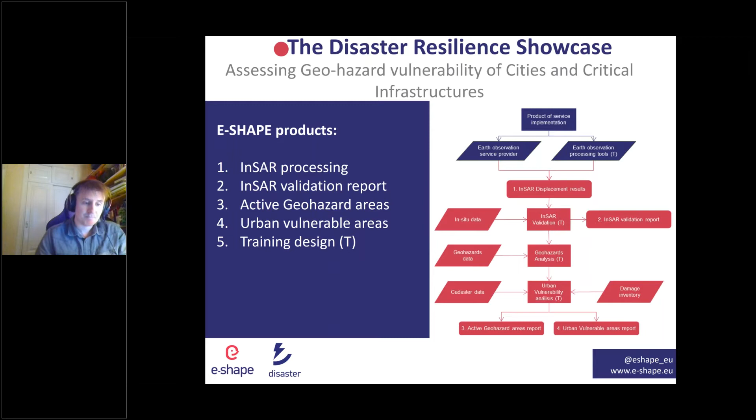The last main product is the Vulnerable Areas report, and this product is supported by cadastral and damage information that allows us to identify the vulnerability of the buildings based on the InSAR displacements. In order to show better the possibilities of this methodology, we have applied it to the Murcia City and Alto Guadalentín aquifer systems, an area affected by land subsidence due to groundwater extraction.

This example has been used to co-design the methodology between the Spanish Geological Survey, responsible for the proposed products, and the Groundwater Authority of Segura Basin, receiver of them and responsible for the monitoring and exploitation of the basin water resources. Our stakeholder proposed us to develop a product that helped them to improve the management of the aquifer system.

For us, the challenge was to provide them the specific information that they required to monitor the Segura Basin during the pumping periods, correlate the detected surface displacements with the groundwater changes, identify the influence area of the pumpings, and determine the accumulated displacement and their impact on the buildings. And make that, this is an important point, make that information useful for the exploitation strategy. In order to do so, we designed the previously presented products that I'm going to explain better with the outputs that we have obtained.

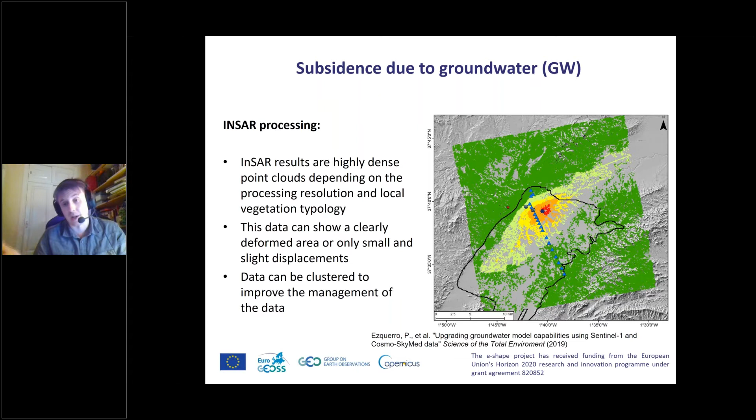In this data also can be clustered to improve their management, and this is one of our first products. Also, it's important to deploy an additional monitoring system to validate the products. This kind of validation needs a contemporary and continuous dataset of GNSS permanent stations, but also can be performed using leveling data or other kind of, let's say, campaign measurements based on GNSS data.

These validation products will provide the root mean square error and the relative error of displacement velocities and time series. If the GNSS or leveling data are not continuous or not contemporary to the InSAR, the validation is only partial, but it's still important, especially for the interpretation of the results.

The active subsidence report is composed of two different steps that define the area of influence of the extraction activities and the temporal evolution of the subsidence. First, using extraction rates and the position of the wells, a first estimation of the most susceptible areas can be done, as you can see in this picture, with this blue line that shows the areas that we think are going to be more impacted by land subsidence, and then when we have the displacement data, we can see if it's correct or there are other triggers that are provoking subsidence.

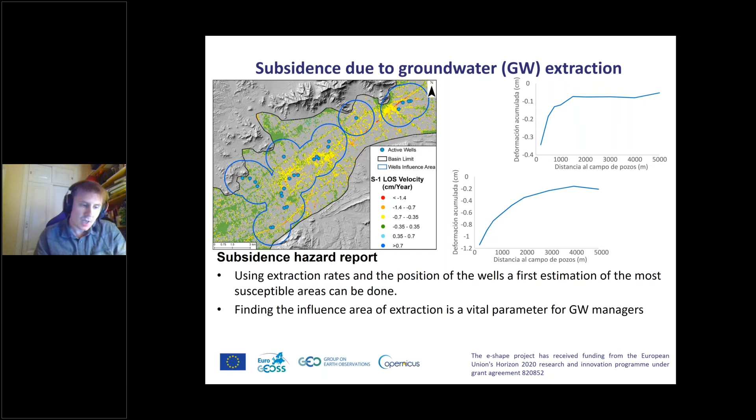The evaluation of the groundwater and subsidence time series also gives us the possibility to identify the extraction and recovery periods and the inflection of subsidence. The correlation or not of them describes the behavior of the aquifer system under extraction stress, especially useful to improve its management. In this case, we show two different behaviors. In the center of the basin, we show a continuous declining trend of the land surface in the red time series. And in the edges of the basin, we only see the subsidence during the last extraction period.

This is because the center of the basin was exploited during several extraction periods, and the external part of the basin was only exploited during the last one. With this information, the Water Management Authority moved their extractions and changed the exploitation strategy to affect less the land surface, but also the impact on the groundwater levels.

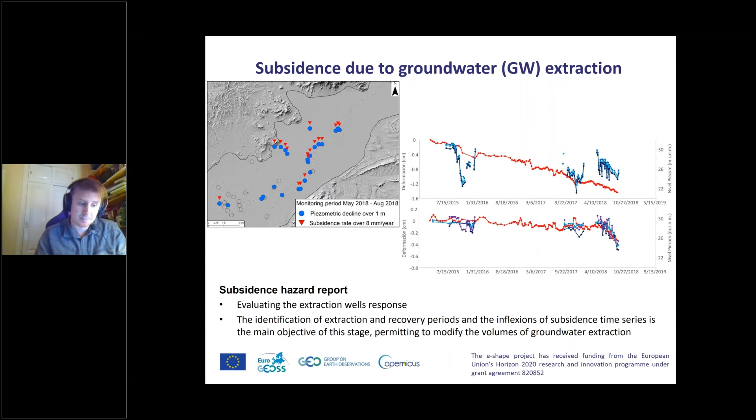The Urban Vulnerable Areas report is one of the most complex products because specific information is needed, and usually new damage detection campaigns need to be planned. Due to those problems, two different levels have been described. The most complex one is based on fragility curves, which are empirically built, combining InSAR data and field data to evaluate the potential damage on buildings affected by land subsidence. Once calibrated, they provide the probability of some level of damage for a certain building displacement. We can even calculate expected economic losses if enough economic data is available.

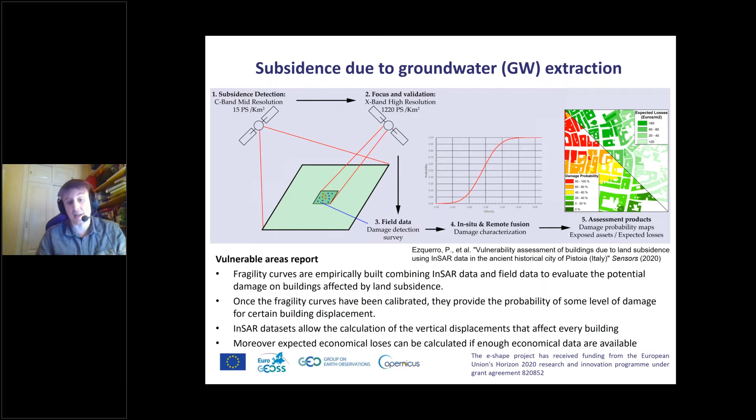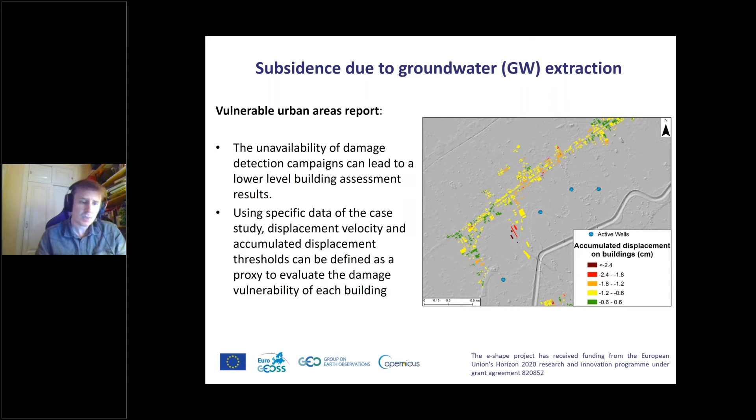The other level only requires cadastral information and combines specific data of the case study in order to define displacement velocity and accumulated displacement thresholds to evaluate the damage vulnerability of each building. All those products applied to the study of an area affected by land subsidence like this help to better understand the dynamics of the aquifer system and adapt the exploitation strategies.

Using the co-designed products, our stakeholder, the Segura River Water Management Authority, has adapted the pumping strategy, moving the extraction to the less affected areas, taking into account the well levels and the subsidence time series during the pumping periods, and reducing the effects. Also, the building vulnerability maps are one of the main thresholds to cut off the pumping in the area, because damages to structures were detected during previous extraction periods, and now they are one of the most important problems, and they have to check carefully if the extractions are generating new damages.

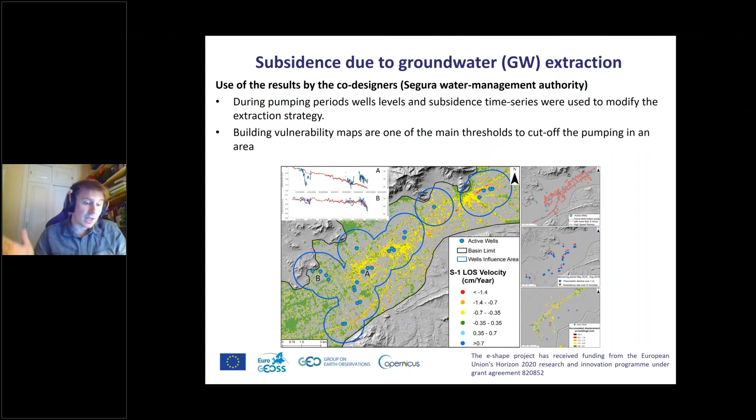So I think while Grazia's preparing a poll about the presentation, there's a question. Carl, in his presentation at the beginning, mentioned that an authority has a budget X and the service may come at price Y, and if they're not compatible, then it's difficult to buy. Have you looked at the cost and the budget available for this service to become operational?

I had a shutdown in the Wi-Fi. Could you repeat the question?

Okay. So have you looked also at the cost of providing this service to the groundwater company or authority and their budget available for acquiring such services to see if it could become an operational service?

At this moment, we have carried out two campaigns. We work in, let's say, a campaign mode. We work with them if they have an extraction campaign, but I don't have the numbers now about the cost of the service. I'm sorry. I can provide you with the information, but not now. Okay, all right, thank you.

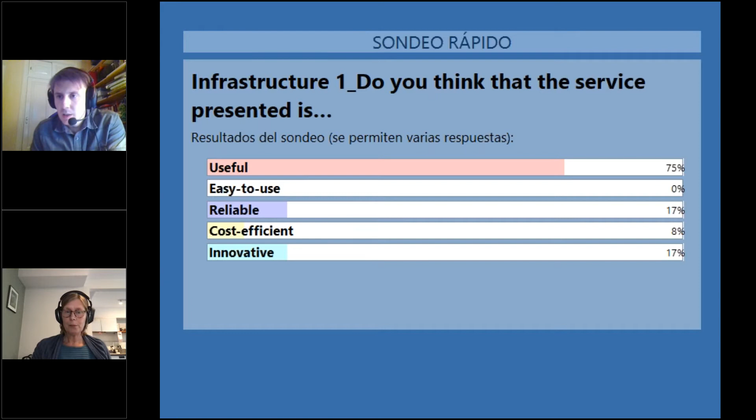So I think there's now a poll about this presentation, which asks, do you think that the service presented is useful? So 3/4 of you say that the service is useful. I guess the easy to use, unless you've used it, you wouldn't really know. Reliable, cost efficient, again, we don't really know what the cost efficiency is, and innovative, 17%. So it seems actually quite in line with the previous poll responses.

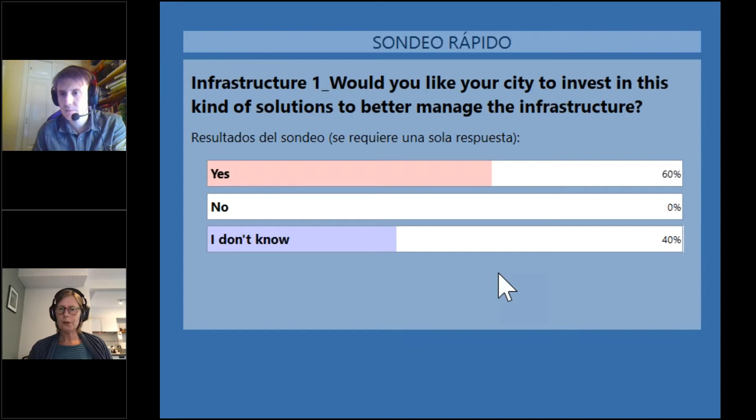Was there a second poll question, I think? Yes. Would you like your city to invest in this kind of solution to better manage the infrastructure? So you now have a chance to answer yes, no, or I don't know. I suppose it's always also a question of knowing how much the cost would be and would it raise taxes significantly if your city did buy it. But based on the service itself, the majority answer is 60%, whereas 40% says I don't know, but there are no people who would not recommend buying it. Okay. Well, thank you very much.

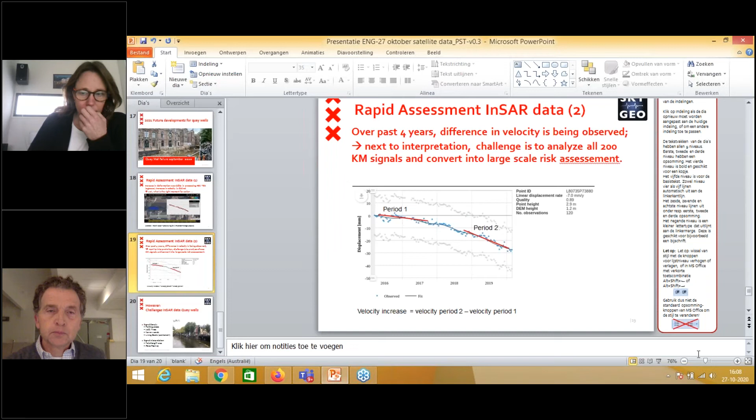So hi everyone, here is a combination of Municipality Amsterdam and SkyGeo. We have a presentation. I cannot deal with the presentation because I didn't open it. This is not the first sheet. This is about the application of InSAR, InSAR in a city environment.

Annemarij, do I have to do it? Can't hear you, you're muted. Yes, Annemarij, sorry, you have to unmute yourself through the interface. There's a micro. Okay, you're muted. Can you all hear me now? Yes. Yeah, it said that the organization muted me, so I couldn't unmute myself. But if you can all see the presentation now, thank you for inviting me. We cannot see the presentation, Annemarij, because I think you shared your screen briefly, but then that... Yes, now it's back. Yeah, excellent. Oh, perfect. Thank you.

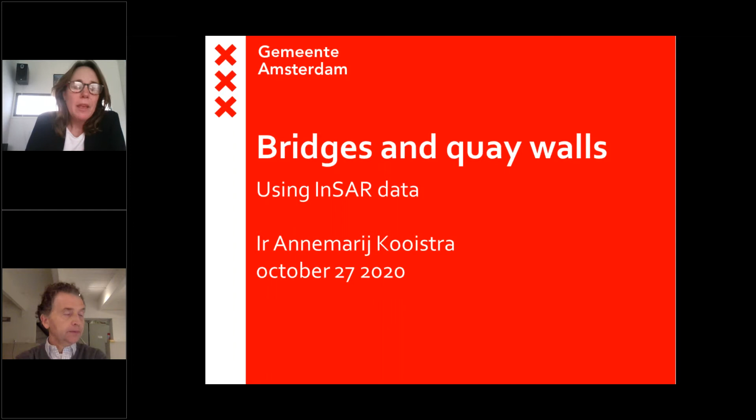Thank you. I'm Annemarij Kooistra, and I work for the city of Amsterdam. And in Amsterdam, we are working on a big program on bridges and quay walls. We have a very nice historic city center with a lot of canals. And we see that with the increasing traffic use, we have a structural overloading of the bridges and the canals. And we also had a period where the maintenance of our infrastructure was neglected. And therefore we need to catch up.

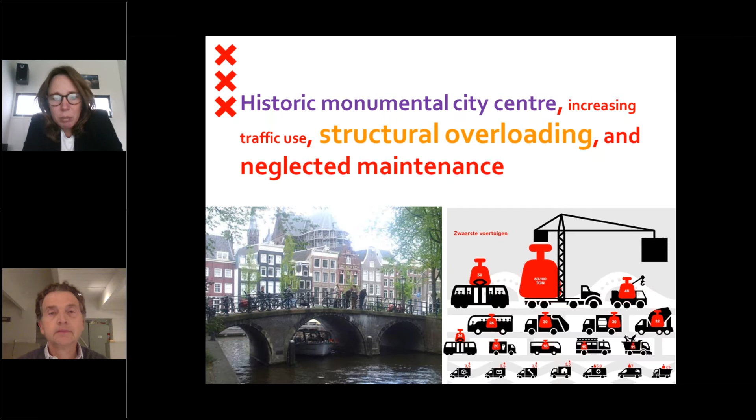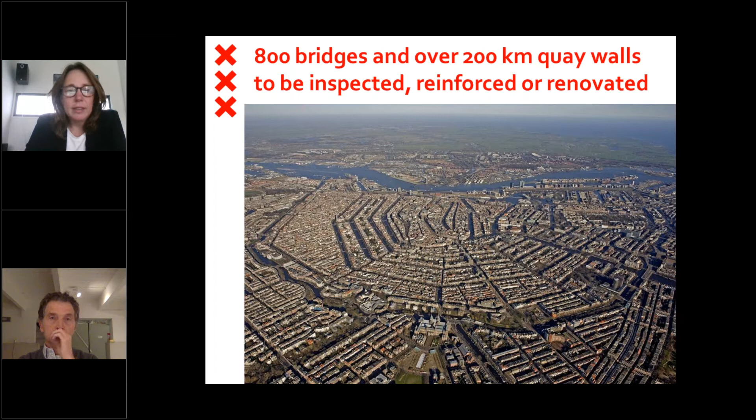And we started a large program in which we intend to inspect and reinforce or renovate 800 bridges that we use for traffic and 200 kilometers of inner city quay walls. This is a very, very large scale, and we are used to handling 1 or 2 bridges and a few hundred meters of quay wall that we renovate. But with such a large program, and also the information that is needed, we said we need to innovate in the ways we are dealing with this.

The innovation we do on many things, and within this innovation we work with the universities and other knowledge institutes, and also with businesses, because all the innovation that we want to develop needs a business model too. And as a city, we invest in this innovation.

Well, one of the things we want to change is how we get data from our existing quay walls and bridges. And deformation of these structures is very important. If there is a lot of deformation, then that's a sign that the quay wall or the bridge needs to be renovated. And that's why we also look at satellite data. And therefore we have a partner since 2017. We work with SkyGeo, and this is where Patrick can tell you something about SkyGeo.

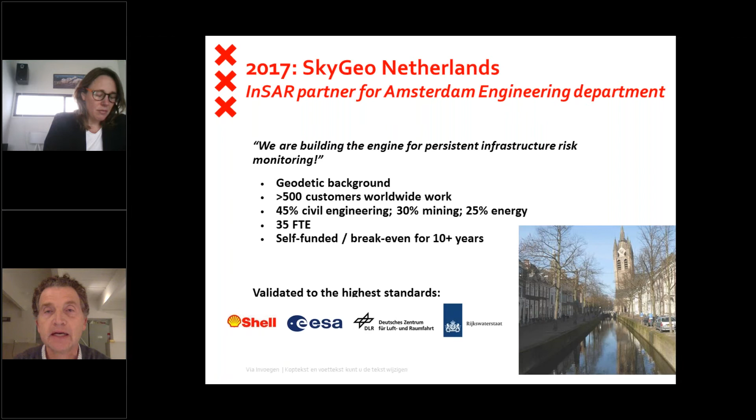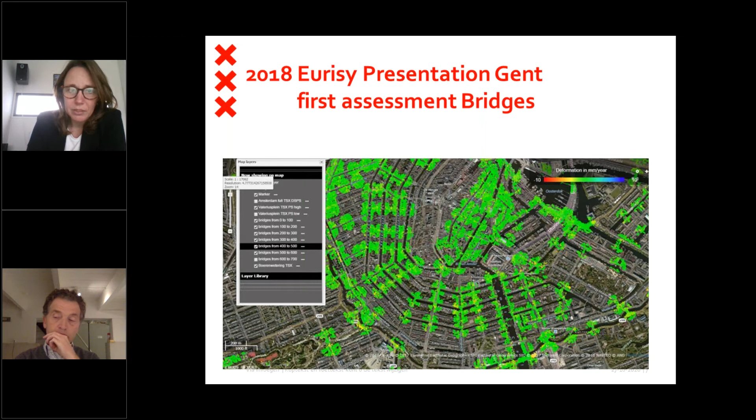By that time, we found out that the data is promising because it's useful for risk assessments. But we also saw that there would be chances for further development to get even more information out of it. But we started to monitor the houses of Amsterdam. Of course, we need to renovate bridges, but with the renovation of bridges and quay walls, we work very close to the old houses along the canals.

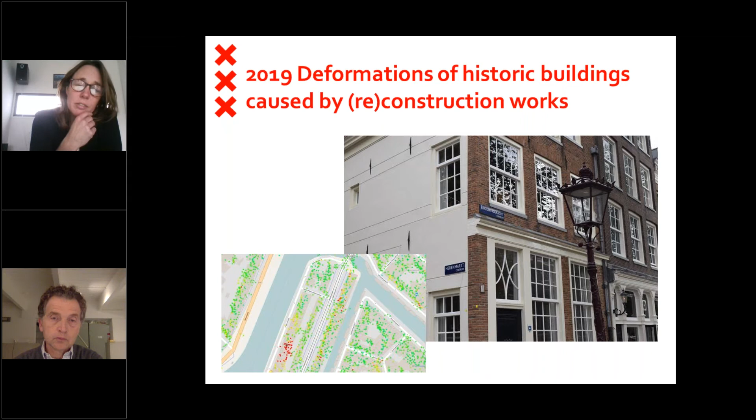And there are risks that there will be deformation induced by the reconstruction works. And the satellite data proved to be a tool to monitor the deformations of the buildings in the proximity of the works. And with SkyGeo, the TU Delft and Deltares, we did an investigation on how we could improve those data. And Patrick, I think you can explain that better than me, what you did in that survey.

Thank you very much. So here it becomes a little more technical. I think the first important element to understand is that we are not working with open data from Sentinel. The level of detail of density and the reliability in terms of XY positioning is such that we need a resolution of 3 by 3 meters, and the Sentinel resolution is 5 by 20 meters. So that's not applicable for the fine density that you find in typically historical city centers. So that's the data we're reviewing.

And I think one of the challenges we made, and this is also where an InSAR provider makes a distinction between, let's say, open source and managing their own source, is we were able to improve coverage by a factor of 5 at least. And that was tested by an independent institute by the name Deltares. It used to be a Water Inspection Institute, and they've now become an independent organization. And together with the University of Delft, we were able to improve the coverage.

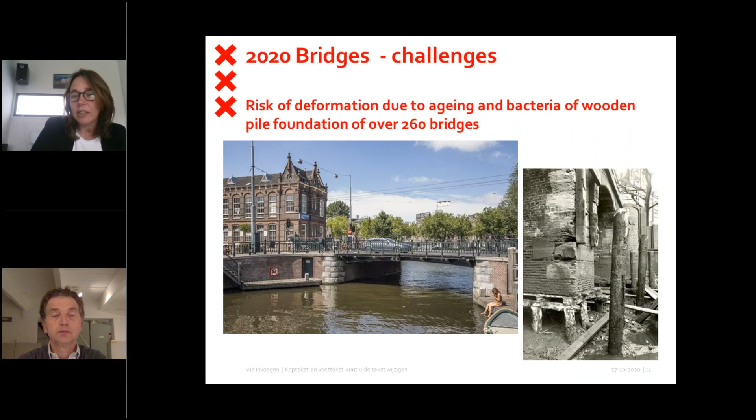What is interesting about this project is, in part, it's also to fill a gap of limited information. So there's some extra pressure or intensity to this project. The first thing we did, we got a list of 260 bridges out of the 2,000 that have wooden piles. Over the past year, I learned through other projects that wooden piles are used in many North European countries. Also in Boston, for example, I came across a project where this is being used. So this is a widely applied technique, used up until sometimes the 1950s, 60s.

What we did here is we used again TerraSAR-X high resolution, and we used two looking angles, two orbits, which I think is important to understand. So we were able to do both, and also look at the horizontal element. Two conclusions: all bridges have measurement points. This is very interesting; it was a question, as there are sometimes big, beautiful old trees standing around them. Only two bridges in the park of Amsterdam have no points or one weird point, because those small bridges are covered by trees. But in fact, it's a very high return that 258 bridges have coverage.

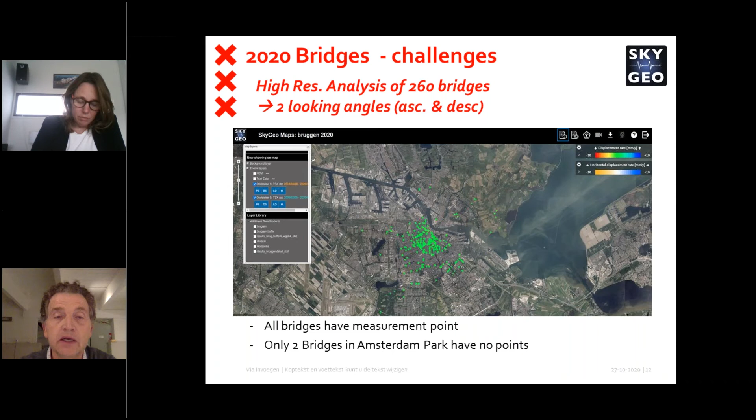So this is just a zoom out. Let's start zooming in, and the next sheet is an excellent example for that. Here you see a layout well spread over the bridge. This is, of course, very interesting. Some points appear in the water. This is partly because we decided to take a little buffer, and it also has to do with the XY 1 meter standard deviation. So these points are all considered to have a relationship with the bridge. Sometimes there are also wooden poles in the water in front of a bridge with a metal cap that can function as a reflector. Now, they're well spread. Nevertheless, this is still a blurry picture to draw a conclusion from.

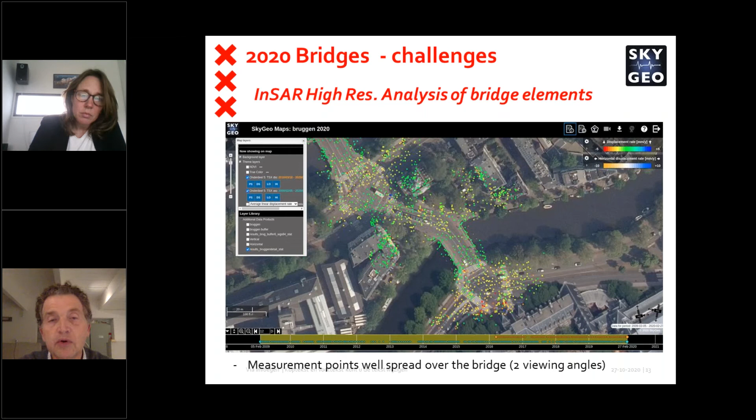So we go to the next sheet where we started to fine-tune the sensitivity. This has more to do with how short or long and how well you should look at the movements of the bridge. This is still ongoing, and it is very dependent on many in situ, local circumstances. This is something that we specialize in, and that we do in collaboration, in this case with the engineering department. Once we defined the sensitivity measurement highlighting the difference, we go to the next sheet, please.

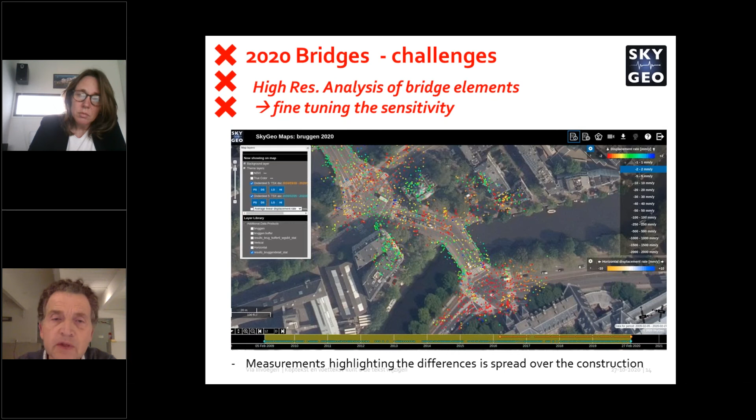Then we introduce the constructive elements that a bridge consists of. And then we start seeing some interesting differences in movements of elements of a bridge, and this is part of getting a first-line risk assessment based on 10-12 years of historical analysis, which is quite a long time. What's going on with these bridges? I have to add that there's heavy traffic on all these bridges. There are trams, which is a city train, buses, lorries with concrete, tourists. So all these bridges suffer from the increase, and there are differences both in the constructive elements and per bridge. So I think we should go to the next sheet.

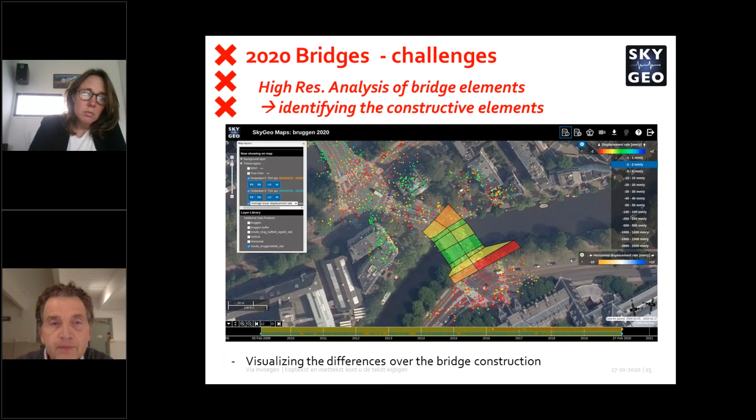Some conclusions. Sound coverage, minimal number of bridges with 0 points. Reliable measurement points on a majority of the bridges, which was of course a main topic. Differential settlement of abutments and between abutments is detectable. There is still interpretational value as the risk framework is further developed. So in other words, how do you assess 260 bridges, and how do you get the right order and the right risk assessment?

InSAR appears as a useful instrument to conduct a baseline. The expectation is that the data may fill the information gap, and the development of the settlement monitoring is an instrument that will be further assessed. So that means that we are identifying if regular updates also give sufficient indication of the movement of the bridges.

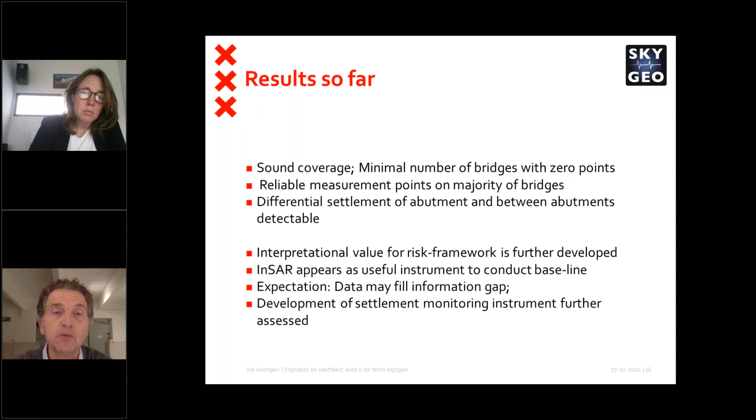I think this part concludes the bridges, but we have still more, Annemarij, because Amsterdam is a great city. It is moving. Yes, Patrick. We are still working on the bridges, and we think it's very promising, and we made very big steps in using it for our challenges in Amsterdam.

But there is another issue, that we are not only working on the bridges, but also on the canal walls, on the quay walls. And in September, it was very clear that this is a very urgent problem. One of the walls collapsed in September, and fortunately, there were no casualties, but this is very risky, and we take this very seriously.

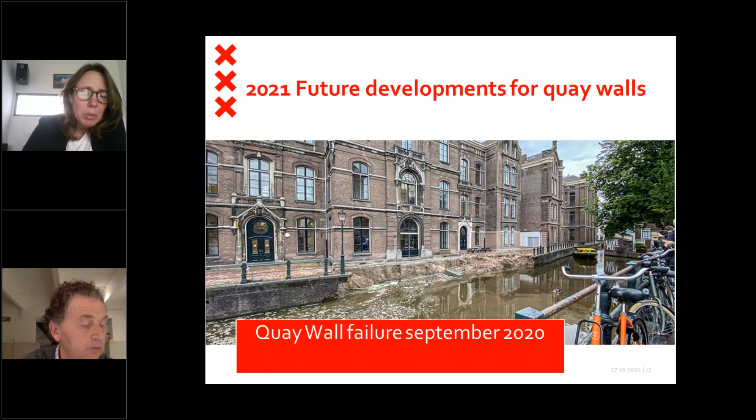So we asked some parties to do a rapid assessment on what can be learned out of this failure. And one of those things is, could we have predicted this to happen? And SkyGeo was already working on the bridges and was working on processing the data, and found out that they also had the data of this particular quay wall.

And therefore we thought maybe we can learn something out of this, how also this could be used for the quay walls, and maybe even to predict situations like this, so that we have an early warning and can prevent a failure like this. Patrick? Yeah. So Linda, we're going to the final sheet, so don't worry too much about the time.

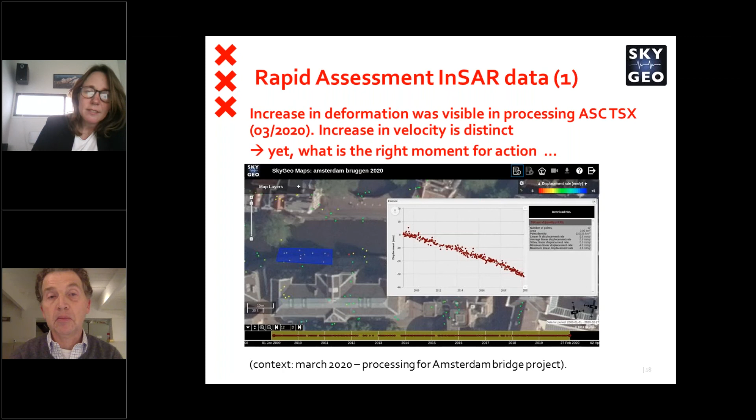So in hindsight, we were never asked to monitor this. In hindsight, we looked in March, it's a cutoff moment for the bridge study. We looked also at this part of a quay wall, and this quay wall collapsed, just so that you get the timeline right, end of August, begin September. And so here, this is a first image where you see increasing deformation was visible. Yet, what is the right moment for action? That's the question. And let's go to the next sheet.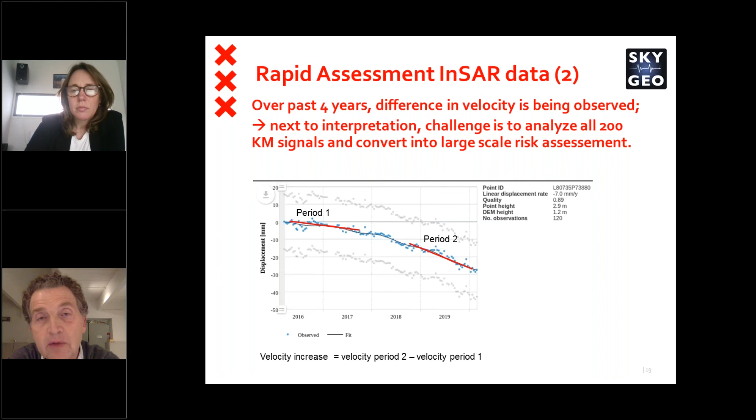But it's also, if you have 200 kilometers of quay walls, how are you going to get signal, InSAR signal, because the quay walls are very pretty, but also the greater public of Amsterdam makes use of them. There's cars, there's living boats, there's all kind of stuff. And so how are you going to convert it? So I think this sheet is sort of a next level challenge that we will work on.

And the first question here is the signal density. What are we going to get? If you see, for example, this quay wall, you see great trees. They're very pretty. They are at least 100 years old, but they will blur the signal. There's parking places that can cause confusion. There's some very narrow canals, and there's very beautiful barges or living boats where people live on a canal. Very romantic.

And once we finalize the signal density, then the next thing is, of course, signal interpretation. So for 200 kilometers, how are you going to manage the risk matrix and false positives? I think there's one more sheet, or are we done, Annemarij? We are done. I thought I had an extra one, but yes, these are the challenges that we face for using this for the quay walls.

They are the largest, but we think we made some major steps in monitoring the building blocks and the bridges, and we think we can use the tools that are made now. Our next step will be how to use it for the quay walls. For the city of Amsterdam, and especially in our program on the bridges and the quay walls, we are glad that we can use these new kinds of techniques to face this large challenge. So are there any questions for me or for Patrick?

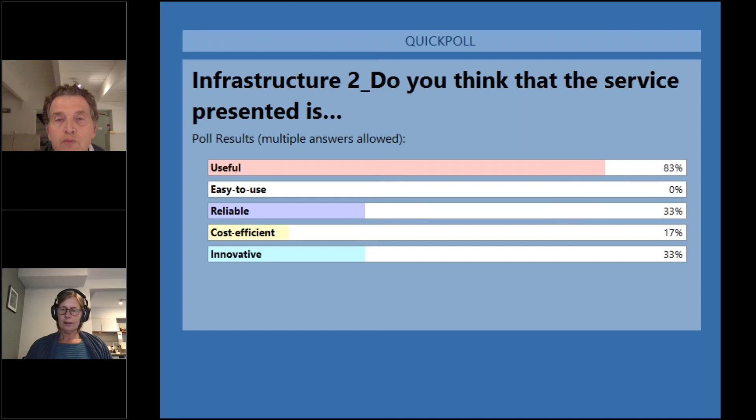Right, so usefulness is high, 83%. Easy to use, I guess people don't really know. Reliable, so it seems that the validation by an organization such as Deltares adds to the sense of reliability. Cost efficient, probably not known, and innovative, also quite high. That's interesting. The second poll question, I think, is similar to the other ones. Would people recommend the city to invest?

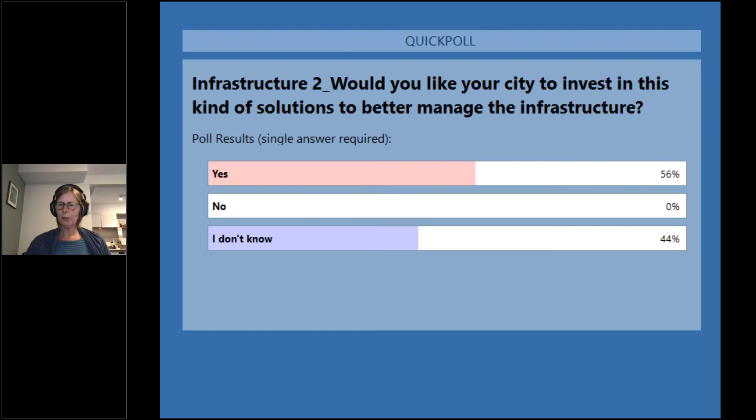Having looked at the quay wall collapse in Amsterdam, I would certainly say yes to that, but I'm not able to answer the poll myself. Okay, 56% yes, 44% wouldn't know. Again, we don't really know why people give these answers. So maybe that could be a follow-up to investigate, because that's close to level.